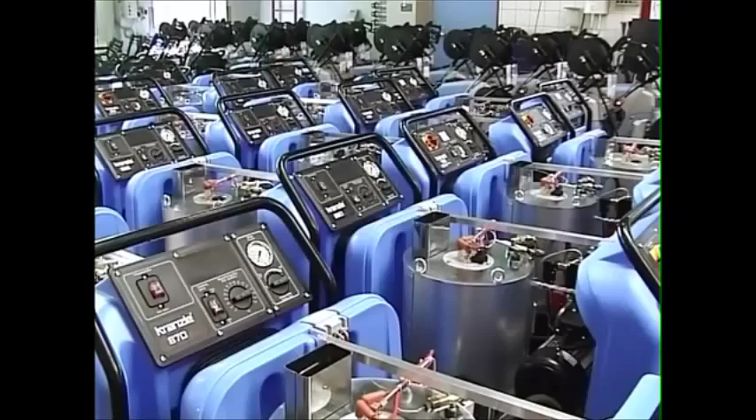All high-pressure cleaners made at Kranzle are subjected to a final inspection, where they are thoroughly examined, mechanically and electrically. All appliances are only made available to customers after this extensive control has been performed. The latest computer-controlled diagnostic methods guarantee reliable functional and safety testing.

Control of correct pressure build-up, pump output and control of detergent valve with caring liquid hose. The hood is installed in order to determine waste gas emission. In the case of this model, the fuel pump is set at 10 bar in order to ensure optimum combustion.

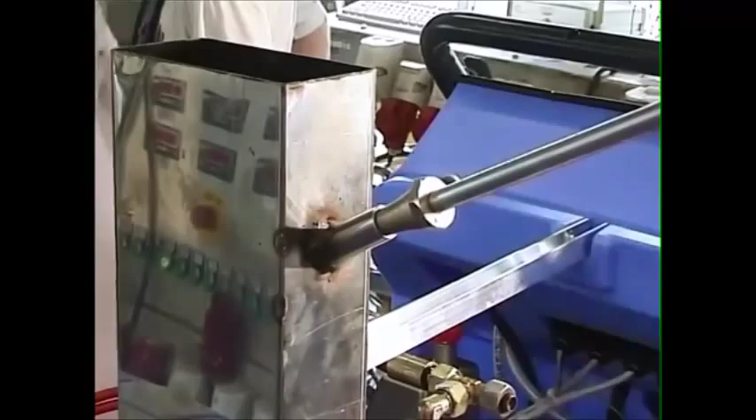The flow monitor is examined to see whether it has been switched off. Then it is fixed. In the case of C-series appliances, you must pay attention to the setting mark. A sensor for determining flue gas values is placed into the chimney. After that, CO and CO2 are manually finally adjusted on the nozzle stick.

Flue gas analysis includes the following measurements: waste gas temperature, O2 remaining oxygen, CO unused components of oxygen, CO2 carbon dioxide formed during burning of fuel, NO nitrogen oxide formed when the fuel burns with air, lambda excessive air, and loss difference to 100% heating capacity. A protocol of test results is kept.

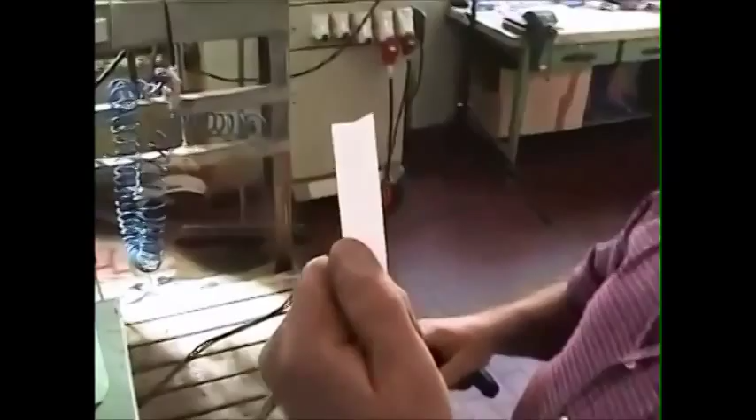Soot particles are measured. The result is compared with the values on this scale. After all these things have been done, the type plate is inserted with the machine-specific data and the serial number. The burner capacity and correct function of the thermostat and digital display on the control panel are checked. The operating hours of burner and pump can be displayed.

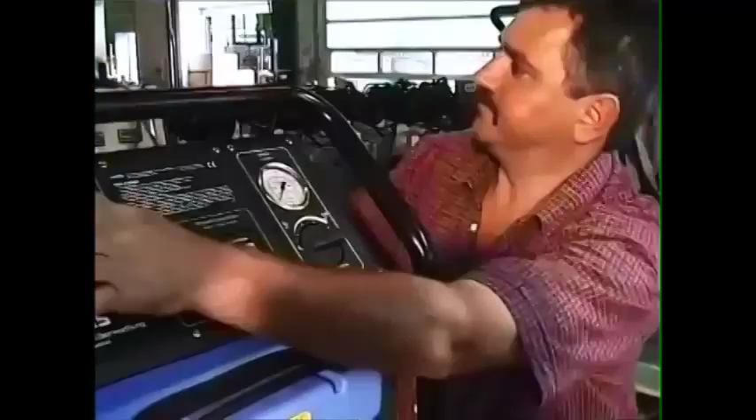Now, after the hand wheel has been removed, the maximum pressure of the machine, in this case 150 bars, is set and adjusted. Now, the safety valve for the heating coil is adjusted as well. The so-called pulsation damper reduces the vibrations in the heating coil.

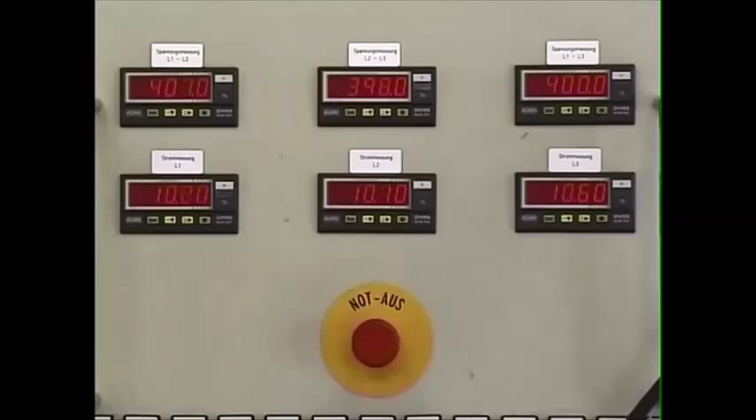Electricity control for volt and amperes. The antifreeze is filled into the machine and placed into the entire circuit. The red paint seals certain setting screws to guard against incorrect settings. If the machine satisfies all requirements, the measured results and the test protocol are attached to the respective operating instructions or placed into the operating manual.

Before making repairs, ask your customer for these documents because technical details and components can change. The protocol is signed by the competent controller so that all results can be followed at all times. Copies are kept on file at the factory. The machine is now ready to be shipped by lorry, ship or container anywhere in the world.

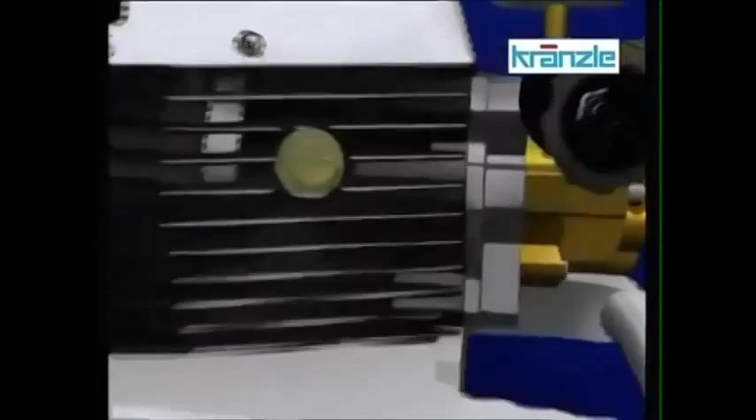The motor sets in motion what is known as the swash plate, designed to push forward the respective pistons and plungers, which in turn are pulled by a spring. This is a real view from inside a running high-pressure cleaner. This opens and closes the valves. This is a real view of a valve from inside a running high-pressure cleaner after starting up the machine.

The 3 suction valves are at the bottom and the 3 pressure valves at the top. In the pump room, the plungers press the water through the high-pressure hose and out of the nozzle. Here, the same process once more, from a different angle.

What happens when you use additional detergents for material care? When the valve opens, a vacuum is created inside the so-called injector. The detergent is sucked in, mixed with water and sprayed out of the nozzle. Closing the gun causes the flow of water to be cut and the pressure to increase while the so-called check valve body is being actuated at the same time.

A ball is now being pushed forward by the control plunger, thus enabling a pressureless water circuit in the pump. The water now continues to flow through a kind of bypass in order to prevent any components from being damaged or destroyed by the prevailing high pressure. This principle is also used with pressure switch on equipment using total stop in order to switch off the motor.

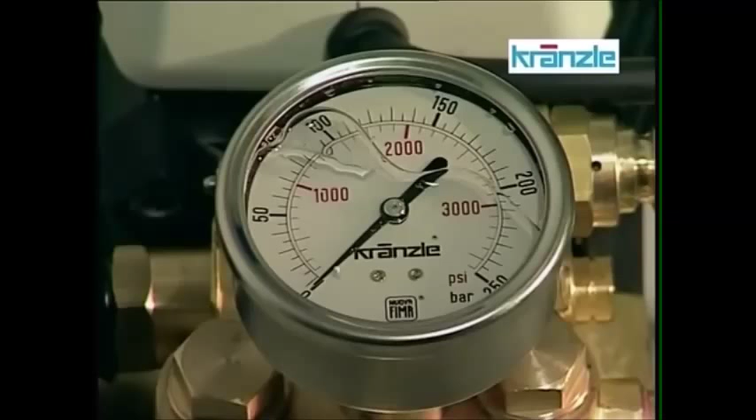Please read the respective operating instructions for your Kranzle high-pressure cleaner. Please note, the equipment may only be operated when it's lying. And, by the way, there's no water in the pressure gauge. All pressure gauges are filled with glycerine to absorb vibrations of the indicator.

To keep your high-pressure cleaner in a perfect, serviceable condition, make sure that it has an adequate supply of water and the correct electrical supply. Unfortunately, not all users do this. First, a word about the water supply.

Check first in the operating instructions or on the specification plate how much water per minute your high-pressure cleaner needs to be able to work. This will be between 7 and 22 litres, depending on the model. You may have to check the water supply on site. This is easy. Fill a bucket with a measuring scale, checking how much water flows into it inside a minute.

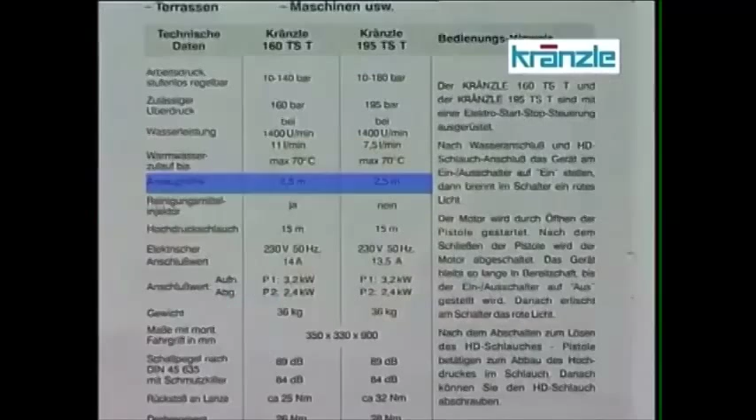If too little water flows out of the pipe, it may be because there are already too many water-consuming devices switched on and there isn't enough left over for the high-pressure cleaner. There's a certain suction height that must not be exceeded. This is normally between 1.5 and 3 meters. Check the operating instructions to determine the exact height.

Now to the electrical supply. There are high-pressure cleaners that work on 230-volt alternating current and others that require 400-volt rotary current. The necessary electrical voltage can be seen on the specification plate of your high-pressure cleaner. This voltage must be identical with the voltage of the power source. An expert can easily check this with a voltmeter.

As with the water supply, if there are too many power-consuming appliances switched on, your high-pressure cleaner may receive too little power. This can then happen to you. The motor can cut out or burn through, so always check with an expert if necessary that you have the right amount of electrical power.

A cable that's too long or too thin can also prevent enough power from getting through. The general rule here is, if you have an extension cable of 10 meters or longer, the cross-section of the cable must be at least 2.5 square millimeters. Now you're ready to start. First, connect the high-pressure lance to the gun.

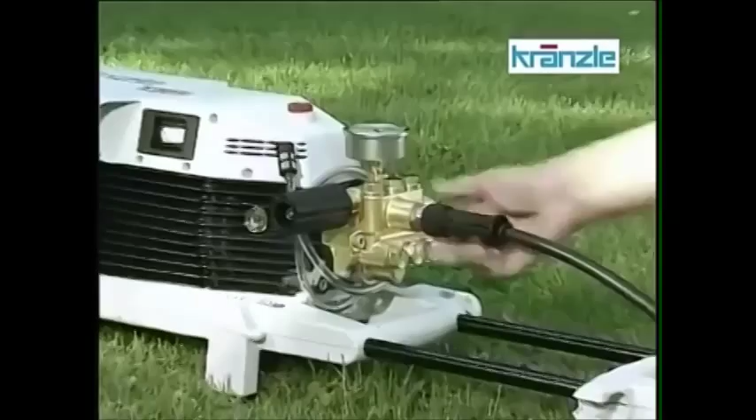Then attach the high-pressure hose. Unreel, making sure that there are no loops. The high-pressure hose should not be longer than 25 meters. Connect the hose to the gun. The safety catch prevents accidental spraying, so always apply it when you finish work. Check this screen filter. The water may have been dirty the last time the system was used.

Now connect your high-pressure cleaner to the water line. The hose, by the way, must have a diameter of at least ½ an inch or 3/4 of an inch, depending on the model you are using. Now switch the system on with the trigger pressed, and you're ready to start. The desired pressure is easy to adjust with this hand wheel, and don't worry, the maximum pressure is already set

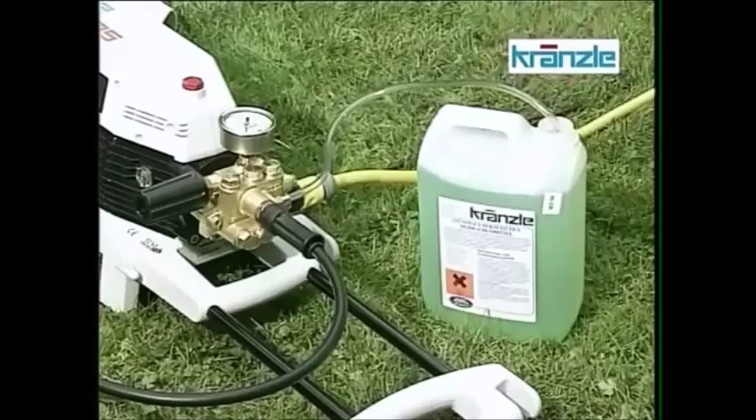at the factory. This hose with its screen filter is used when working with an additional detergent. Simply turn the regulator nozzle if you want to mix in the detergent. Remember that it's not possible to suck in additional media if you've extended the high-pressure hose to a length of more than 20 meters. If you are using a variojet nozzle, simply slide the nozzle forward and the detergent will be mixed in automatically. Slide the nozzle back to stop mixing.

After finishing work, switch off the system and turn off the water. Now press the trigger slowly until the pressure is released, that is, until no more water comes out of the nozzle. Apply the safety catch to make the gun safe. You can now unscrew the high-pressure hose. Switch the motor back on for about 20 seconds to completely empty the pump. Switch off the system and pull the plug out of the socket.

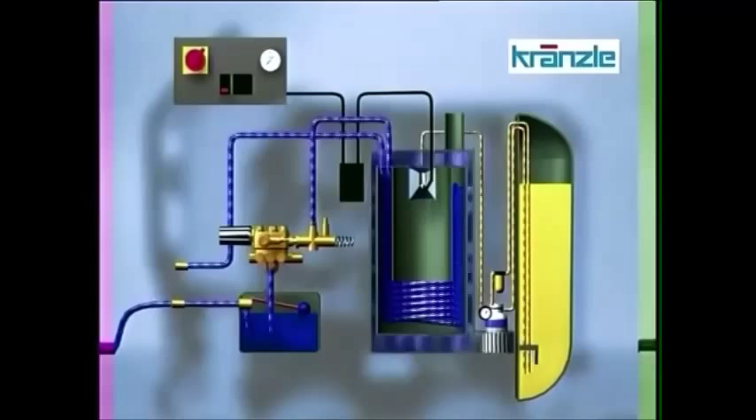At the underside of the pump, fresh air is sucked in, directed into the combustion chamber and preheated. Fuel is injected through a nozzle and mixed with the air. And finally, the electrodes ignite this mixture. The flame burns from the top to the bottom, and the resulting hot gas flows past the heating coil, thus heating the water. The exhaust gases are released through the chimney.

At present, Kranzle offers 3 types of hot water high-pressure cleaners in different designs and output categories. The O series, the 5 series with flame monitoring, and the new C class also with flame monitoring. The therm is so finely balanced that you can turn it in any direction by slightly tilting it. Apply the brakes straight afterwards.

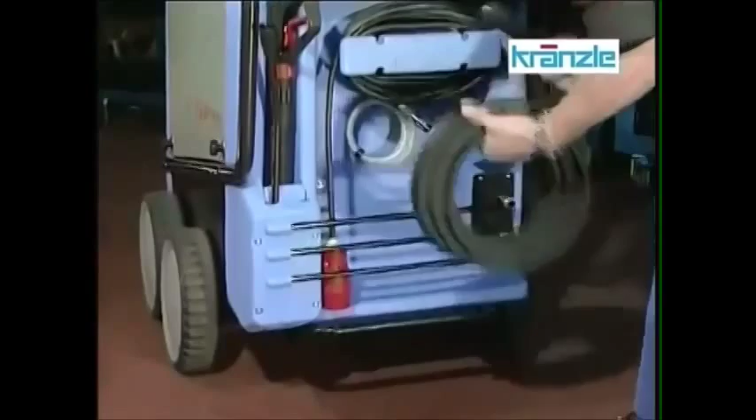Now connect the high-pressure hose to your therm. First attach the high-pressure hose to the spray gun and lance. This spray gun with incorporated pressure adjustment is available as an option only for 400-volt units.

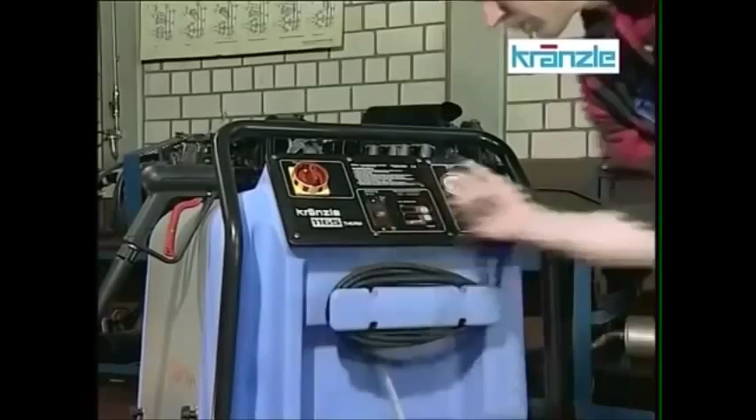Attach the water hose to a water line and turn on the tap. Now connect your therm to the electricity. Press the trigger of the spray gun and switch on the therm. Open and close the gun several times to bleed the system. Here on the 5 series and with this switch on the 0 series.

The therm is supplied with this starlet gun as standard. In the ignition off position, the therm is used as a conventional cold water high pressure cleaner. To heat up the water, you must switch on the combustion unit. Possible leaks between lance and nozzle or on the handle must be corrected immediately, otherwise the components may wear very quickly.

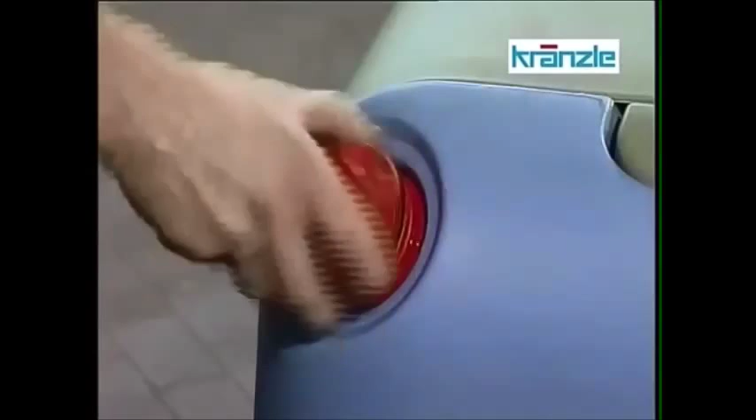Check beforehand that there's fuel in the tank. If you're working in closed rooms, you will have to follow the rules concerning the extraction of exhaust gases. This adapter for the exhaust pipe can be obtained as an accessory. Now switch on the burner and set to the desired temperature, digitally with the 5 series, and with this thermostat on the 0 series.

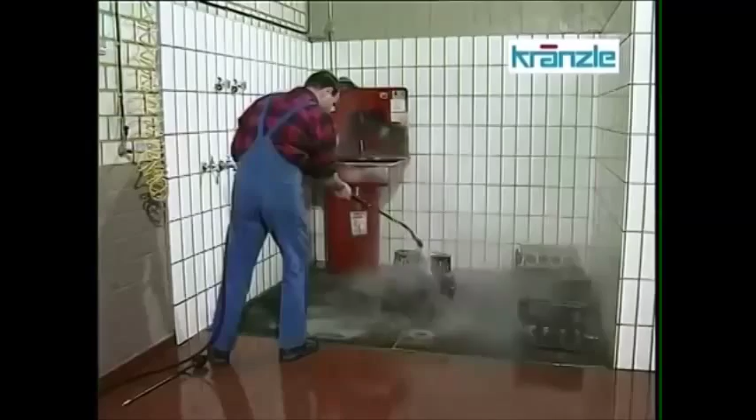This is how to activate the steam stage up to 150 degrees Celsius. And again at this knob on the 0 series. On all models, the working pressure and the steam stage are set on this hand wheel. If you're working with additional media, you will need to put this small hose in the container of medium. Now open the valve for the medium so that it can be sucked in by the pump.

The therm switches itself off automatically if the trigger is not pressed for a period of 20 to 30 seconds. It starts up again when the trigger is pressed. The safety feature switches off the electricity entirely if the gun is not used for around 20 minutes. But don't worry, all you need to do is press the master switch.

When you've finished work, pull the plug out of the socket. Turn off the water tap. Press the trigger of the gun until the pressure is released. Apply the safety catch and detach the water hose.

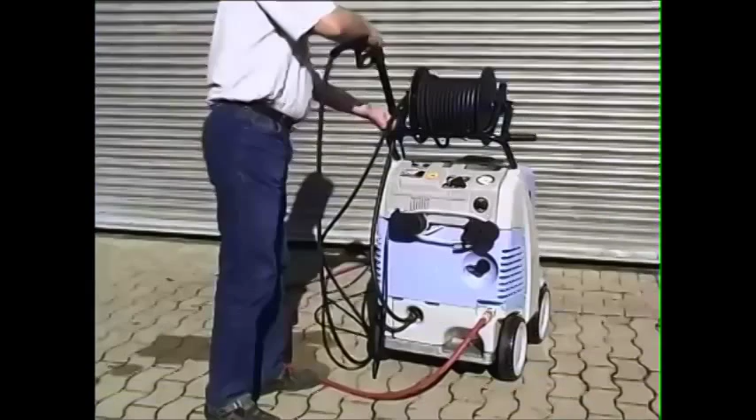Activate the brakes. Connect water supply. There is a viewing window for oil level control next to the hand wheel. Now you can start to work as usual. Turn on the therm and clean. Connect the burner and select the temperature. If you want to work in the steam level, you must set the thermostat to over 100 degrees Celsius and reduce the pressure to below 30 bars.

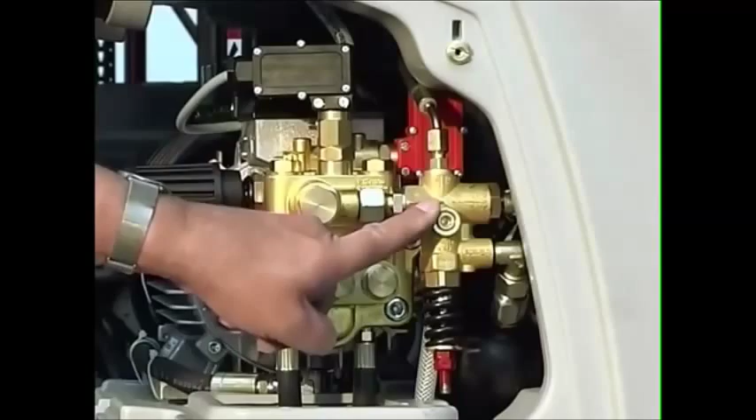We will now show you how the therm C is designed. Here is the black pressure switch for the burner start and stop, the safety valve for the heating coil, and the red pressure switch for motor start stop. The screws for the water tank fixation are also under the lower casing. The drain screw for the water tank is located here.

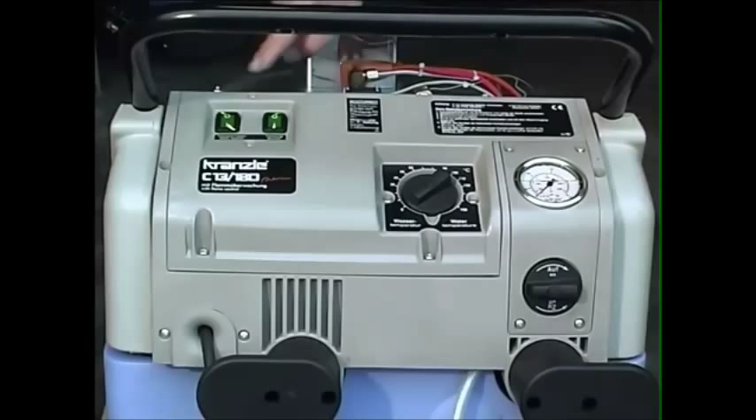When the burner is switched on and the gun is closed, the oil pressure manometer shows full pressure. This is the so-called SP fuel pump. In the case of machines with Suntec pump, the manometer shows full pressure when the solenoid valve is open. The control panel is new on the therm C. You must loosen these screws to get to the complete electric systems. Remember the screw under the thermostat.

The arrangement of the components under the control panel is also new. Main switch, ignition on off, excess temperature release, motor protection switch, motor contactor, thermostat, board on which these are found, fuse for ignition transformer left, on the right hand fuse for burner motor.

And connections for photocell, float switch, flow monitor, red pressure switch for motor start stop, black pressure switch for burner start stop, and rotation thermostat. Here you will find the flow monitor, photocell and waste gas excess temperature release.

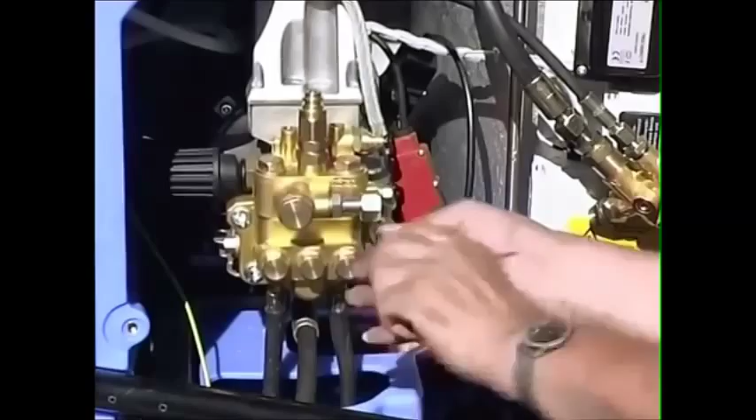Four screws hold the pump head. Now you can easily remove it. The pump seals can stay on the plungers. The motor is fixed to the lower side of the appliance by 4 screws. To remove the motor, loosen these screws. Remove this panel from the terminal box.

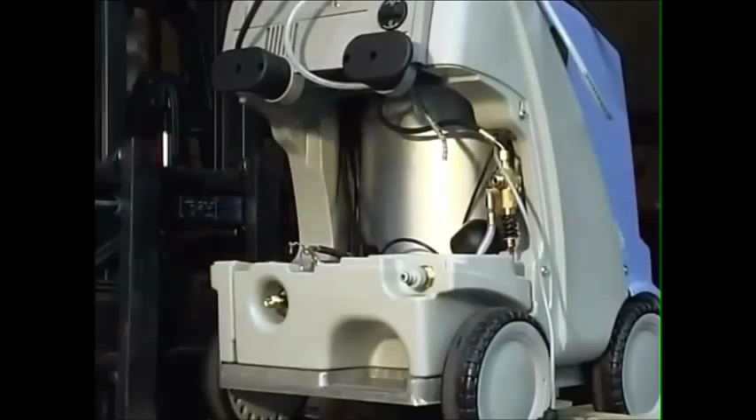Loosen all cables from the terminals. Now you can remove the motor. Here you see an optimally equipped workshop. Clear arrangement of the different tools, special tools, diagnostic equipment and measuring instruments. To make work easier, put the pump into a vise.

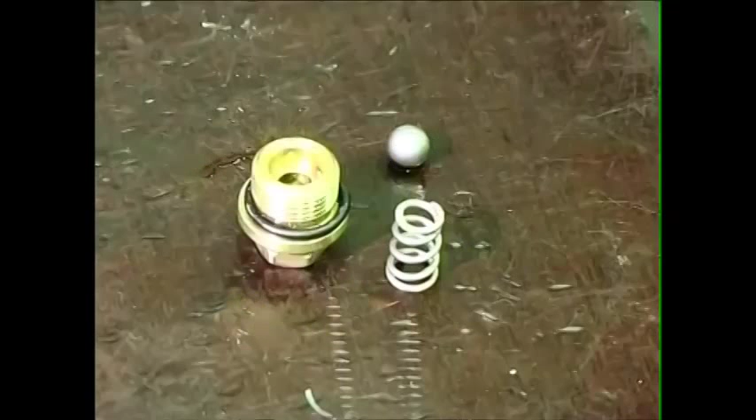We first remove the hand wheel with the regulation piston. Then the safety valve for the heating coil. Bypass valve with spring. O-ring and ball are located on the opposite side of the hand wheel. You must use a screwdriver to squeeze out the safety ring, and then a bent-pointed plier is useful.

Use a hammer and screwdriver to lift out the stainless steel seat, and then the O-ring. When you put the unit back together, make sure that the order is correct. O-ring and seat. Safety ring with the opening upward until it is in the stipulated position.

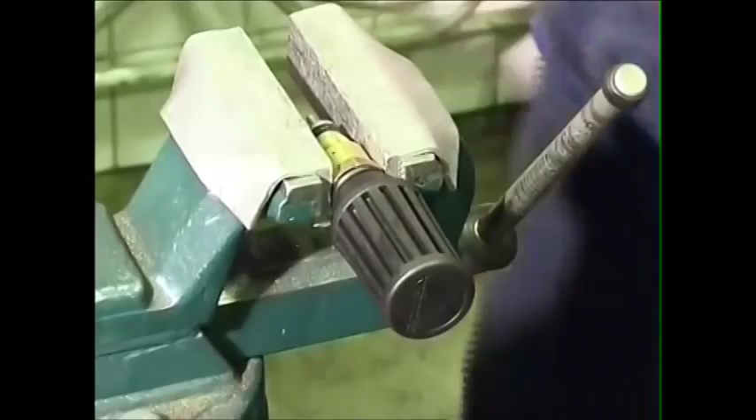Now ball and spring and locking screw. The spring is conically shaped. The side with the smaller diameter belongs onto the ball, and then the locking screw. For repairing the regulation piston, you must first screw off the hand wheel. Remove the closure cap. This is the only way you can get to the nut. Unscrew the hand wheel.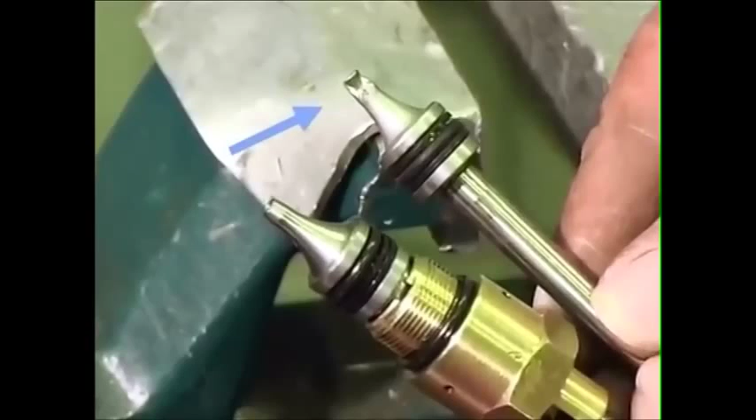Wear on the peak of the regulation piston indicates that the appliance was continuously in bypass mode due to a small nozzle or contamination to the seat and the ball. When putting the parts back together, make sure that the order of the pressure regulation is correct.

Now, we remove the pressure switch for motor, start and stop. If seals wear in a very short period, this probably means that the pump sucks in air via the detergent valve, water supply or via worn high pressure sleeves or leaks to the hose, leading to regular switching on and off. Here you see the individual parts of this pressure switch in the right order.

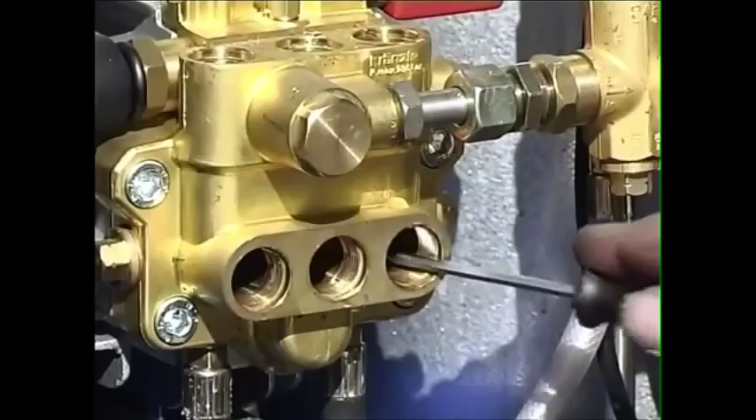Remember to check O-rings for dirt or damages. Quick wear to O-rings can be attributed to cavitation. You can rinse the valve openings with water, like this. Put all valves back on and tightly screw them.

If this does not help, you have to check the suction system for tightness. For this purpose, connect water supply directly to the pump. First, remove the suction filter. Check seals, hose bendings and clamps. In the case of O and 5 series high pressure cleaners, you can connect the water supply directly to the pump. There are different connecting variations for various machine types. This is a possibility.

This is the solution for Therm 870 and C series. Now, for Therm 870 and C series, clamp the 2 suction hoses so that suction is tight.

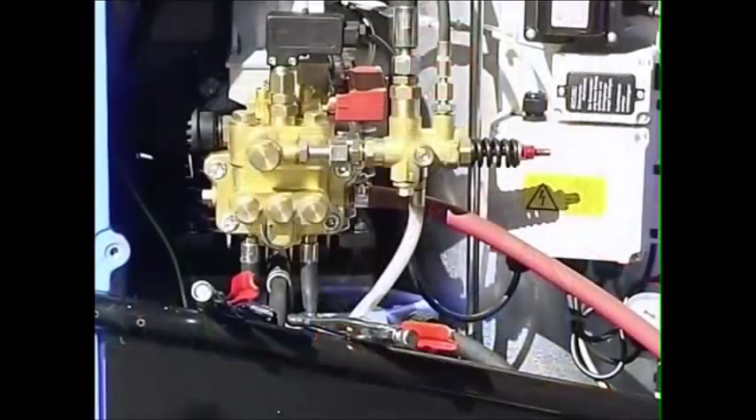If the detergent valve is closed and the detergent hose leaks, the detergent valve is not tight enough. Pull off the check valve first. To control or replace the detergent valve, you must remove this cap. Remove the knob. Now you can loosen the screws and pull up lining and turn it.

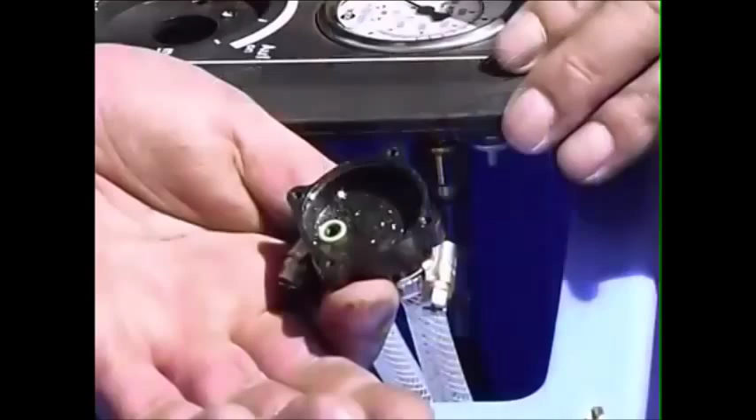You must now replace this O-ring or this one. When reassembling, make sure that the suction hose leading to the high pressure pump is connected to the side where the small O-ring sits. Now your high pressure cleaner should suck perfectly again.

Floater may be dirty or defective. It is in the water box. There are 2 floater versions. This is the new version. Basically, both versions are interchangeable with some minor adaptations. You can take the floater apart for cleaning. Check for permeability of holes in the membrane.

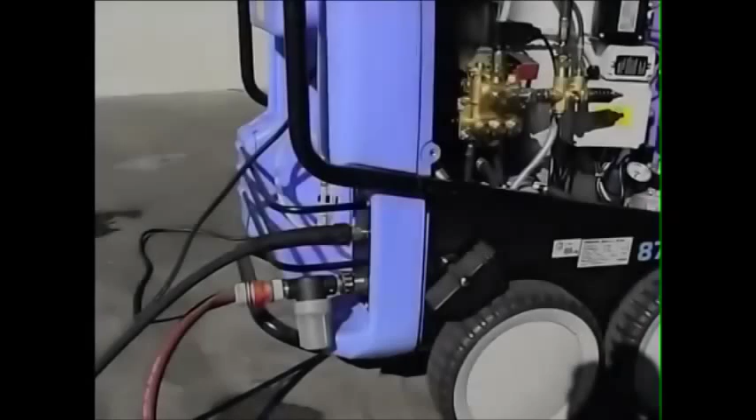Here you will find the water filter. You may have to clean it or replace it. Check the water pressure. In some models, there is some filter in the water inlet.

First, check the return body of the unloader for dirt or defective sites, here with the O and C series. If the sealing area is already damaged, you can carefully rework it with a counterbore on a drilling machine. Now rescrew everything. The return body is behind the connection of the manometer hose in the 5 series.

Then check to see whether the red pressure switch is working. The regulation piston must move. Check micro switch, terminal and cable connectors. The problem may be related to the control circuit board.

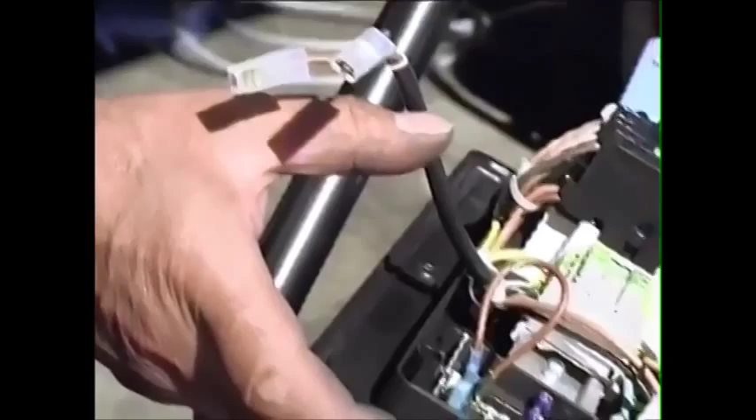Check the cable connections and, if necessary, put a bridge between terminals 5 and 6 in the case of the O series. In the case of the S series, do this for terminals STS1 and STS2, and terminals 4 and 6 for the 5 series. If start-stop still does not work, the circuit board is defective and must be replaced.

Open the control panel. Most likely question: is the machine connected and live? Check the voltage and electronics of the machine accordingly. If there is no current flow in the switch, it must be replaced.

If there is voltage on the contactor coil, but the machine does not start, you can use a screwdriver to mechanically move the contactor and to start the machine for test purposes. If the machine now starts, there are 2 possibilities. Check the cable connections and contacts. If the contactor is defective, replace it.

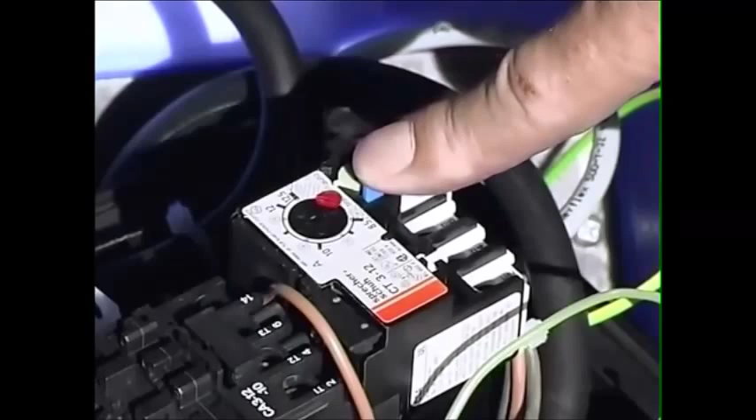The next possibility. The voltage is too low, triggering the motor protection switch. It is placed in the initial position. Determine whether the ampere number has been correctly set for the machine and whether the voltage is correct. The correct position of the motor protection switch is automatic. The motor protection switch can be defective. In this case, it must be replaced.

At first, loosen the 4 screws to remove the pump head. Now it can be easily removed. Sleeves can stick to the drive. Now remove seals and O-rings.

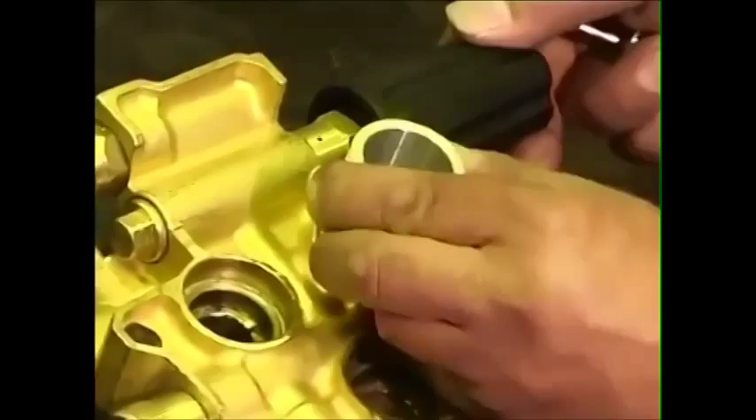Match a repair set consisting of seals, sleeves and O-rings in the right order to each plunger. To facilitate assembling of spare parts, we offer special tools. You can obtain these from us. When replacing sealing sets, you must respect the order and the installation direction. First, the hard ones without pressure ring. Then the leakage ring, and the soft seals with pressure ring.

Take a look in your operating instructions to determine whether you must use a brass intermediate ring for this type of pump. It is often not easy to remove the spacers on the plungers. Turn the motor on briefly. The spacers are loosened by the vibrations. Now you can see whether one of the 3 oil seals leaks or not.

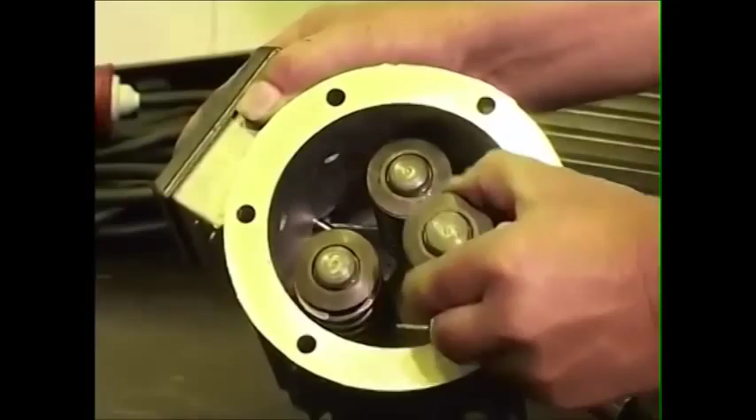Here you will find the DU bushings that can be replaced after wear. A special tool is helpful for replacing the DU bushings. Put the new DU bushing on the tool. The old bushing is replaced by the new bushing due to the pressure from the vise, or it is pressed out by a press.

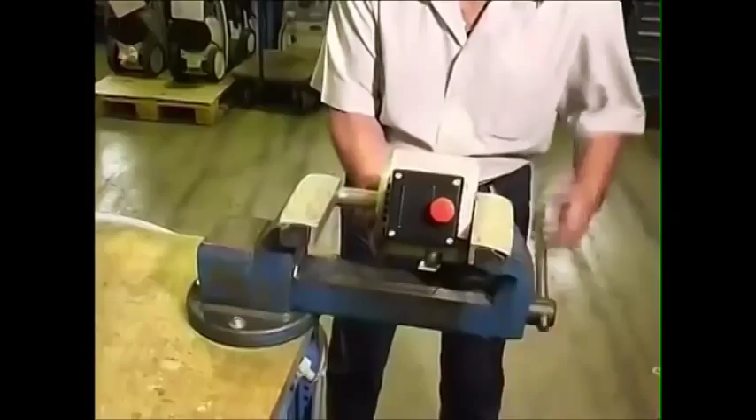The same task in the case of smaller models. If the guide of a DU bushing is damaged, housing plate or housing must be renewed. Now, shaft disc, roll cage, AS disc, and finally the swash plate must be removed. If it sticks, you must use a special drawing device. Screw and the swash plate can be removed.

Four hexagon socket screws secure the bearing flange A side. Remove the feather key and withdraw the flange with this special tool. Did you remove lock ring and fan wheel behind the motor? Now you can use a plastic hammer to pull the rotor to the front and remove it.

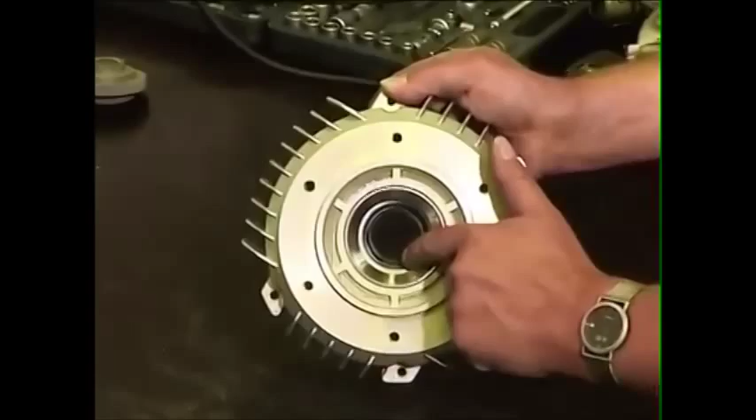The ball bearing is located here, with tolerance ring in the bearing seat from the end of 2002. If necessary, replace shaft seal or bearing of A flange. Here, in the case of motor size 112.

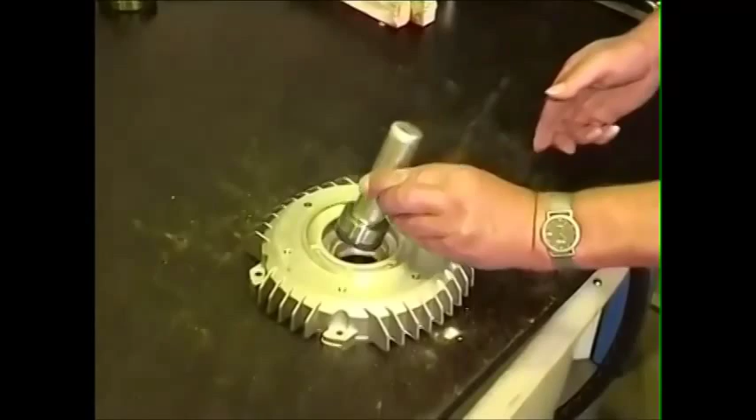To reinstall bearing and shaft seal into motor size 112, here in the picture, simply place parts on this special tool and install. The bearing ring is inserted and pressed in by careful, even beating with a hammer. The same procedure for motor housing sizes 80 and 90.

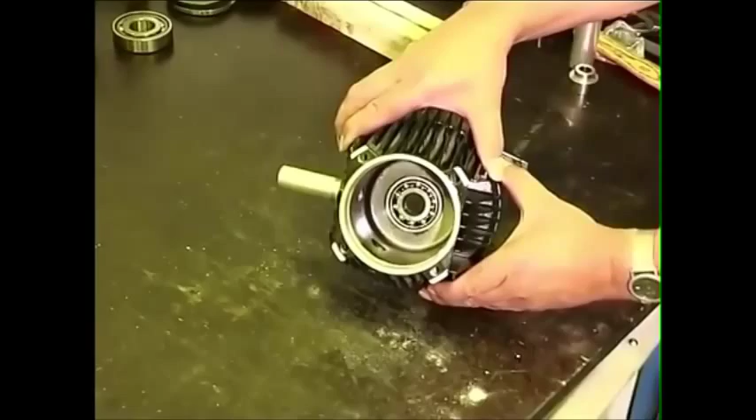Now you can put back everything in the opposite order. Tighten screws of motor flange evenly. The torque is 3.5 kilograms. Carefully place the bearing on the rotor with the help of the special sleeve and bring into position. Do not forget the feather key.

Using a plastic hammer, hammer on the swash plate. The AS disc, the roll cage and the shaft disc.

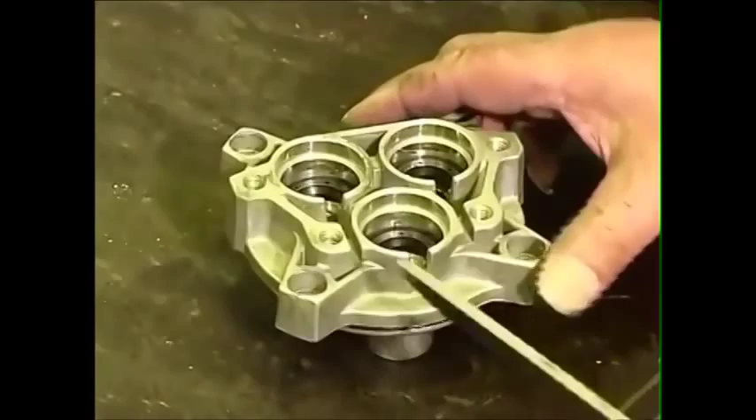Now change the oil seals. This is how the old oil seals are removed. Here, the oil seals in smaller models as a comparison. The disassembling tool fits all sizes. The new seals are fitted with a special tool. In the case of motor sizes 80 and 90, they are installed in the same way.

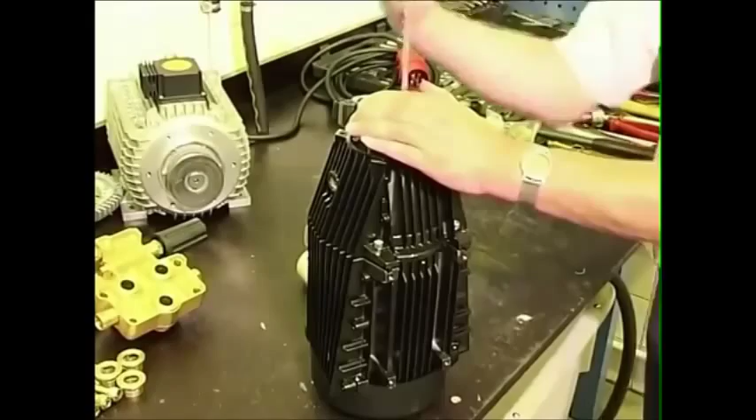As comparison, here the removal of the drive in motor housings of series 80 and 90 is shown. After the screws have been loosened, take out head with plungers, springs and bearings. If the swash plate sticks, it is removed with a special extractor.

This is the reed contact of the flow monitor. The floater body contains a magnet that triggers the reed contact of the flow switch. With a measuring instrument, for example, an ohmmeter, you can check function of magnet and reed contact. The safety valve for the heating coil is located here. Seals must be cleaned or replaced if necessary.

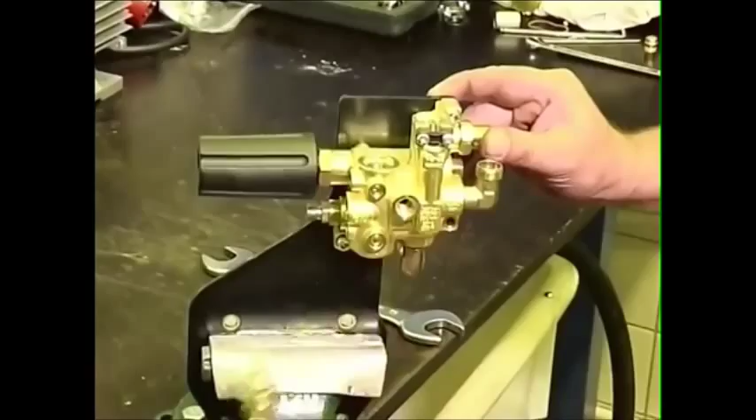After removing the inlet piece, we tilt the safety block for better demonstration. The ball of the bypass for the heating coil safety valve is removed. As shown, seat and stainless steel ring can be replaced, then reassemble everything in the right order. The hand wheel and regulating piston of the unloader are removed. If necessary, seals can be cleaned and replaced.

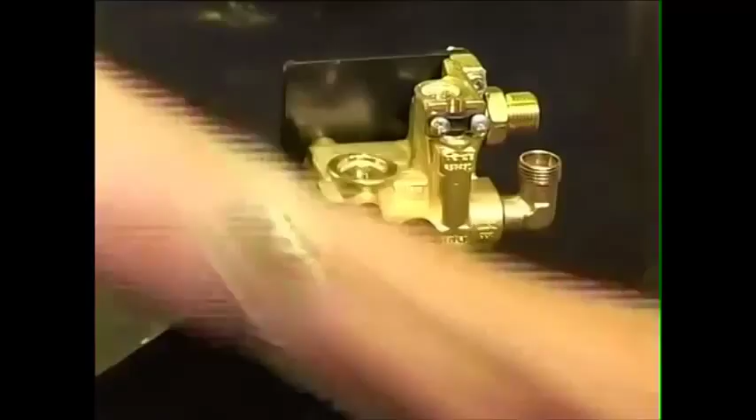The pressure adjustment of the bypass unloader can be removed with seat, spring and ball. There is an O-ring behind it. The closure screw for the return body of the unloader and the connection for the manometer are removed now. Leaks result in the return body being switched on all the time and quick wear.

Pay attention to the installation direction of the spring. The side with the smaller diameter belongs on the ball. Note the installation order. The stainless steel seat is held by the connecting part in the safety block. Do not open these 4 auxiliary bores for processing. They have no function at all.

If the burner is turned on but the waste gas is still cold, it can be attributed to the following causes. Check to see whether there is enough fuel in the tank. The fuel filter may be dirty. If it is, clean it. Remember to clean the fuel tank as well. For this purpose, you must open the drain screw on the bottom to empty the tank.

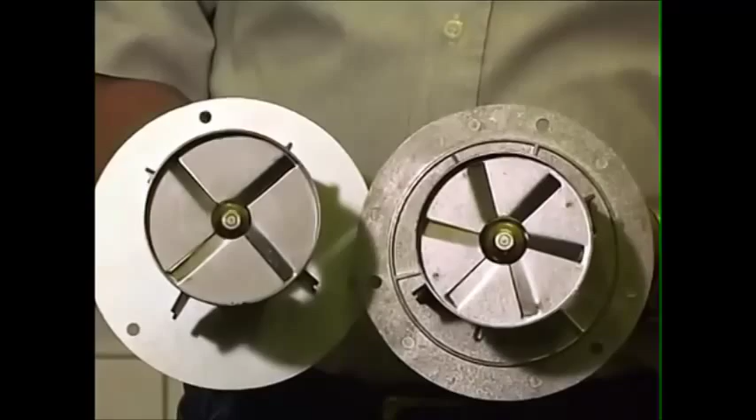You may have to set or renew the ignition electrode, or the fuel nozzle may have to be replaced if it is dirty. For this purpose you must remove the entire nozzle stick. Loosen all connections and pull the complete nozzle stick upward. There are 2 different variants with 4 or 6 air inlet openings. To change the fuel nozzle, loosen these hexagon cap screws.

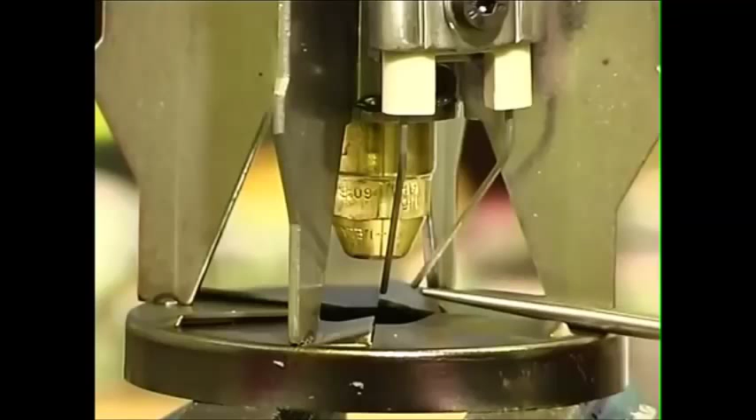After the replacement, reinsert the new nozzle with sealant. The optimum distance between the electrodes is 3 mm. The distance to the nozzle tip is 5 mm. On the oil supply line, you can set the air volume by sliding. This ensures optimum combustion. Pushing downward results in less air supply. Pushing upward results in more air supply. This depends on the fuel quality and the atmospheric pressure.

Now check the function of the black pressure switch, which starts the burner. For this purpose, bridge contacts 3 and 4 for the O series. There is a switching plan in the terminal box. Contacts 11 and 9 for the 5 series. Check the fuse. There are spare fuses in the terminal box.

Terminal 1 and 10 in the O series and terminals 16 and 19 for the 5 series are for the voltage of the ventilator motor. For the O series, you can check the voltage of the solenoid valve on terminals 8 and 12 and on terminals 17 and 20 for the 5 series. All of these functional tests apply for the 5 and O series. Contacts are on the circuit board for the C series.

2 different oil pumps are used. To the right, the old model, Suntec. As replacement, you can obtain this SP oil pump with pre-finished connections from us. The order number is 44073.

The float switch in the oil tank prevents the oil pump from running dry and the oil tank from draining completely. This is how the floater switch, located below on the fuel line, is removed. You can easily determine whether it is defective with an ohmmeter. Test the circuit board by pulling the 2 plugs for the floater switch. Then, place a bridge over the 2 bars by 5 and by 6.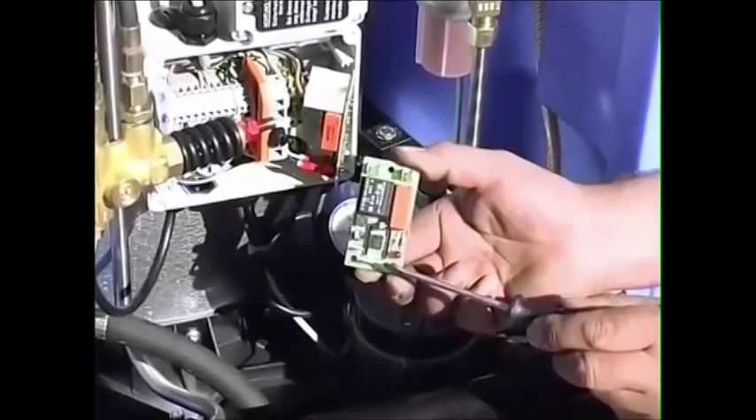By withdrawing and plugging a contact, you can check the function of the float switch. If the machine operates now, the circuit board is defective. To check the magnetic valve, pull the plug and bridge the 2 cables of the magnetic valve. You must have first checked to see whether there is 230 volts.

Determine the voltage on the ignition transformer for the O series via terminals 2 and 11, via terminals 15 and 18 for the 5 series. If there is a voltage, switch the machine off prior to the next step. Remove the plug from the electrode and connect it directly to an external ignition electrode. You must place it on a safe isolation.

Now you can briefly switch on the machine, but pay attention, do not touch the ignition electrode. If the electrode functions, the ignition transformer and ignition are okay.

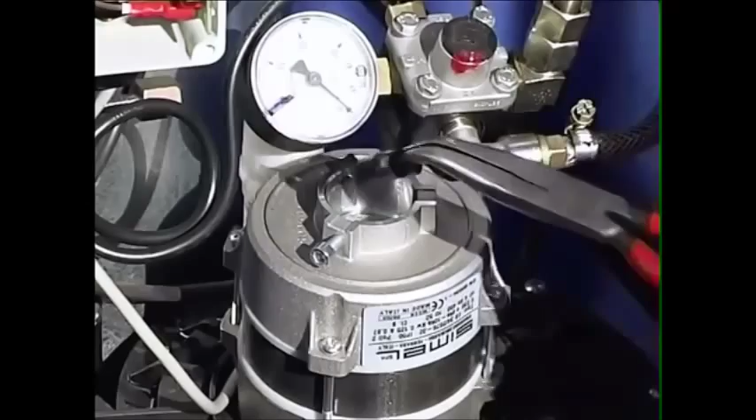Now we will show you how to remove the oil pump. Loosen the hexagon cap screws on the pump shaft and all connections. Now pull the entire pump upward. The coupling is here below, or you can use a bent-pointed plier to pull it from the plug-in connection. The fan motor with fan wheel is fixed to the fan casing with 11 screws.

This waste gas excess temperature release is activated at 240 degrees Celsius, among others when the heating coil is calcified or full of soot. Normally, the waste gas temperature is 190 to 200 degrees. To start again, please press in again after approximately 10 minutes of cooling time. This probe measures the temperature.

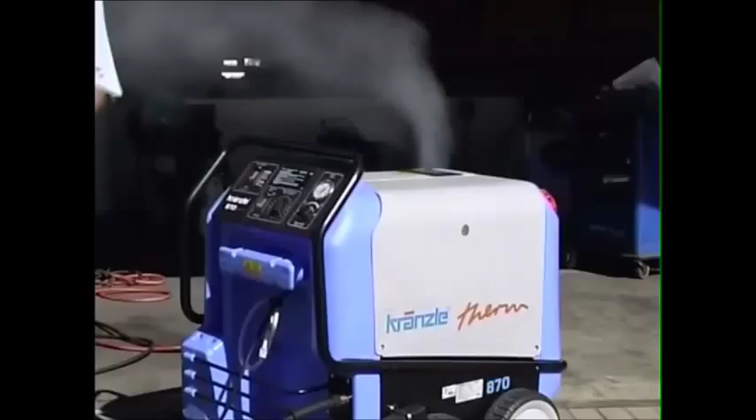If you still cannot switch on the burner, the rotational thermostat is defective. Make sure that these 2 terminals are sufficiently tight. Or check the temperature probe by supplying external heat. You may have to replace it. Heavy smoke development indicates that the heating coil is full of soot, poor fuel is used, or the insulating plate is full of fuel.

As preparation, you must do the following. After you have removed the nozzle stick, loosen the connectors for the heating coil and for the fuel pump, the fixation screws for the outer cap of the heating coil, as well as the probe for the waste gas thermostat. Now you can lift the outer cap. Watch out for the centering edge when installing.

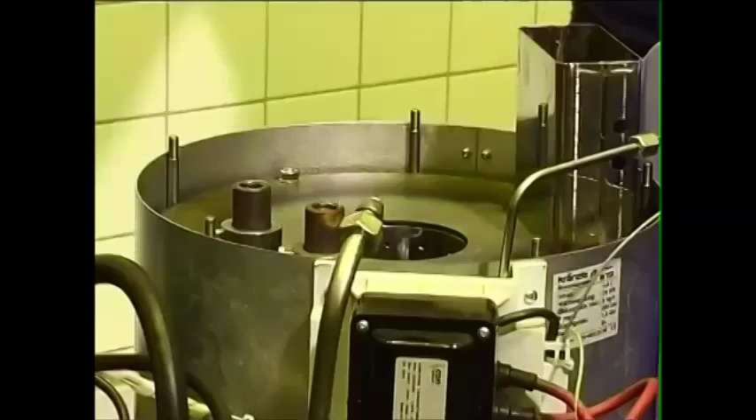This is a special feature with Kranzle high pressure cleaners. It makes sure that the flame is in the middle of the combustion chamber and thus in the optimum position when installing and even later. The inlay of the heating coil can also be easily removed after the screws have been loosened.

By the way, the wound heating coil is 34 meters long and can hold 5 liters of water. With a 25 centimeter long flat iron that you clamp between the coils, you can easily pull the heating coil upward. The flame deflector and the insulation plate can now be removed. Clean the burning chamber, replace defective parts if necessary, and reassemble the unit.

When you turn on the thermostat, 888 lights up briefly on the display. This indicates that everything is working fine. If error is displayed, check the cable and cable terminal of the temperature probe line and replace the special cable if necessary. The plug may have become loose from the control panel. Make sure that it is plugged in tightly.

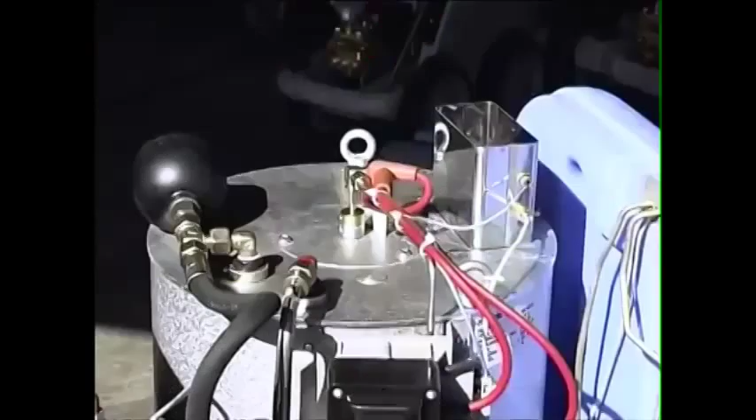You may also have to replace the thermostat. It may also be wet. In this case, allow it to dry. The error message FLA lights up. This means that the burner cannot start. Check the fuel filter, ignition electrode, fuel pump and solenoid valve.

Ignition transformer and this temperature probe for the flame monitoring. Once you have replaced the probe for flame monitoring, watch out how you insert the contacts. White on the outside, green on the inside. Starting autumn 2003, the machines have been equipped with an optical flame monitoring. You can find information about it in the chapter The New Digital Display.

If there is enough fuel in the tank and the error message oil still lights up, the floater may be sticking, a cable is defective, or the supply tubes are clogged.

Up to now, the thermostat has only indicated target and actual temperature. During some operations, it takes too long after cooling for the desired temperature to be reached again. The new percentage mode elegantly solves this problem. The operator no longer only inputs the desired temperature, but can also input the heating time in %. Thus, the temperature can be kept constant in a very narrow range. There is more detailed information in your operating instructions.

You can also read operating hours of the pump with P, and of the burner with F, both new features. On request, you can deactivate the 20-minute safety switch off. Here you can find the circuit board of the new thermostat settings. And there is the display.

Up to autumn 2003, the Therm was equipped with 2 probes in the chimney. The upper probe measured the waste gas excess temperature, and the lower probe flame monitoring. If the temperature did not climb above 100 degrees Celsius in 14 seconds, oil supply was stopped. New models monitor the flame with a photocell. Thus, a second probe in the chimney is no longer necessary. Oil supply will stop immediately if no combustion takes place after 4 seconds.

These 2 circuit boards are possible in the Therm O series. The old version is on the left, and the new version is on the right. Of course, both versions are interchangeable. Here are the contacts for current supply. Connectors for the reed pressure switch by 5 and by 6, and the connection for the safety coil control. To turn off the 20-minute safety cutout, you must separate the third bridge of the IC in this version. The article number for this version is 42503 for 400 volts and 42504 for 230 volts.

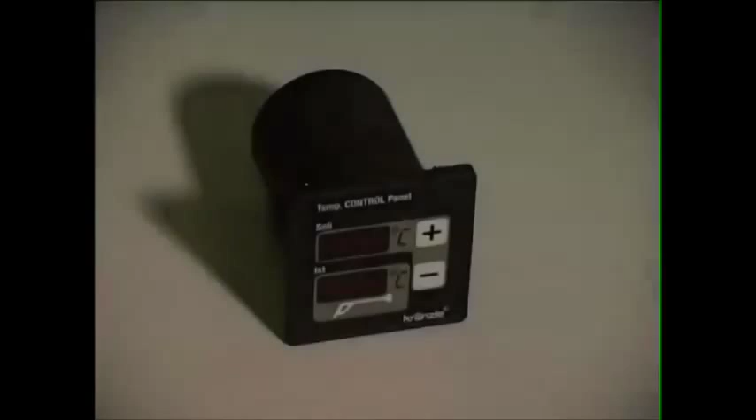This thermostat has not been available since July 2004. You can get this transformation set from us at a special price. Article number 441013 for 400 volts and 441014 for 230 volts. It consists of 4 components. 1. Thermostat display. 2. Photocell. 3. Cover plate of nozzle stick and 4. Circuit board for machines equipped with optical flame monitoring.

When you transform a machine, you must make sure that the contacts for the temperature probe are connected here: white cable to terminal 1, black cable to terminal 2. A photocell must be connected here. These terminals are not occupied because they are foreseen for special functions.

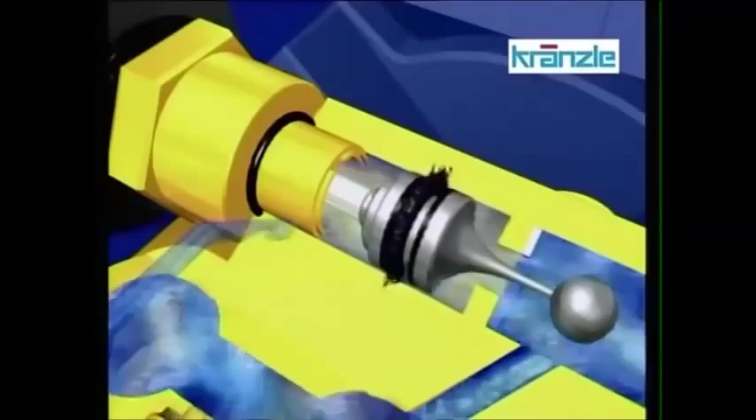Insufficient water may also cause control piston and check valve body seals to be damaged. The pump does not switch back to the pressureless circuit, the hand wheel can be moved backward and forward, and the pressure gauge shows full pressure. Damages caused by cavitation appear first on the O-rings, so that you can compare. To the left are new O-rings, the other O-rings have been damaged.

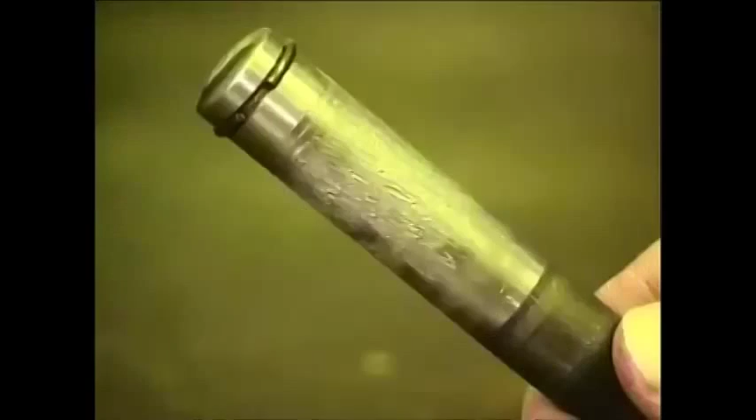If you do not change the oil seals in good time, transmission damages can also occur. Plunger guides can be destroyed, and plungers can be damaged. And as a result, the running area of the plungers can also be damaged. The condition of damages provides information about the causes. Cavitation can also lead to damages to bearings.